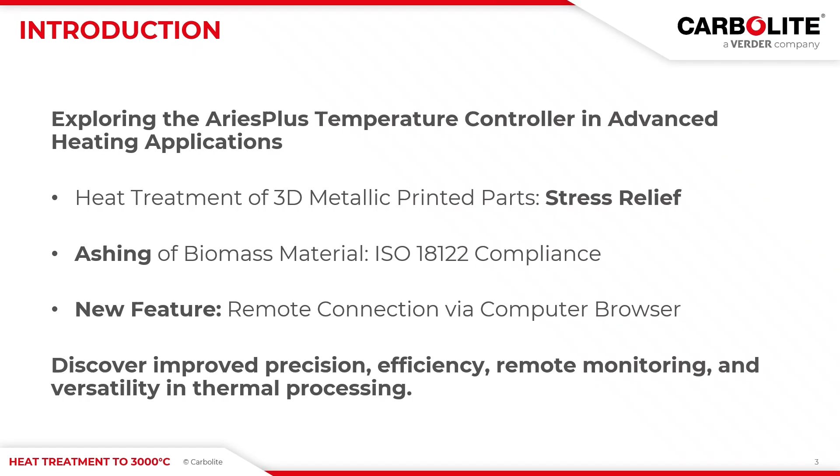Let's begin with our first application, ashing of biomass material in accordance with ISO 18122. We have picked one specific standard to highlight. In reality, what we will talk about here can be relevant for all regulated ashing processes.

Determining the ash content in biomass is essential for quality control and regulatory compliance in various industries. Processes like this demand superior temperature control, strict adherence to test standard protocols, and reliable data traceability for reporting and analysis. The AriesPlus controller addresses these needs by providing reliable temperature ramping, programmable ashing cycles, and web-based access for real-time monitoring and data logging. These capabilities help laboratories achieve both accuracy and efficiency while maintaining full compliance with regulatory standards.

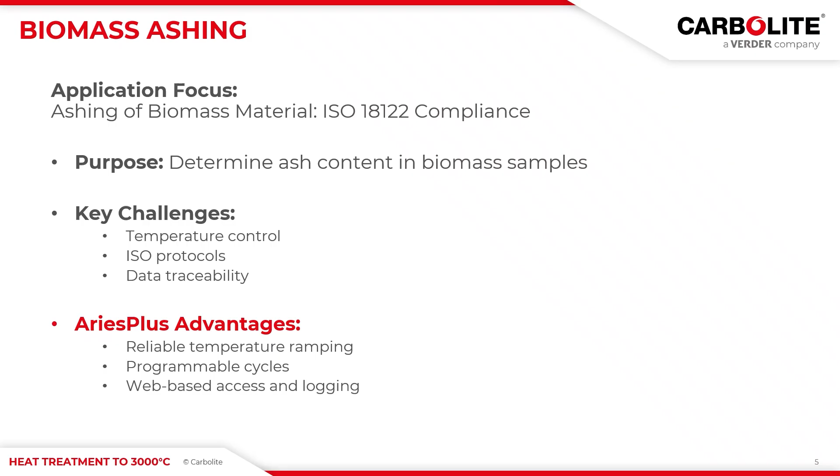The temperature controller should be capable of precise ramping and holding at set temperatures, with programmable ashing cycles that can be utilized for different ashing standards. Features like real-time monitoring, remote access, and automatic data logging are essential for traceability and for maintaining comprehensive records. Built-in alarms and safety features help protect both the equipment and the samples. Finally, process parameters such as the correct ashing temperature, duration, and sample preparation must be carefully managed. Thorough documentation of results is vital for both quality control and demonstrating compliance with ISO requirements.

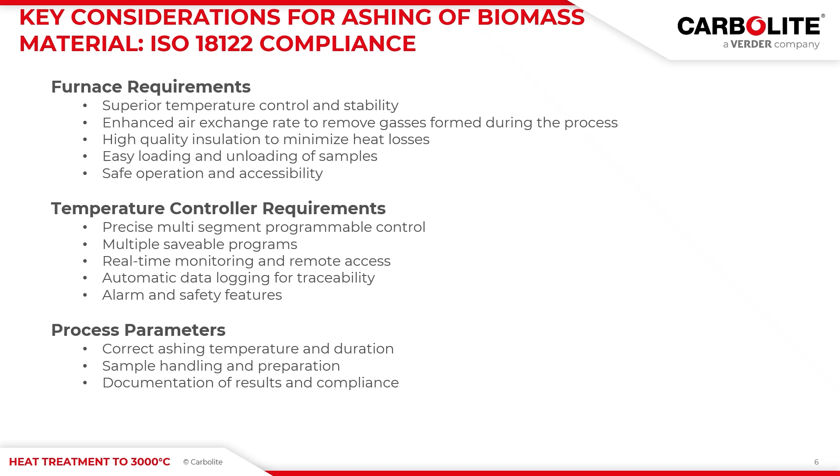The ashing process itself requires a specialist furnace that can reliably maintain the target temperatures. Crucibles used in this process must be inert and capable of withstanding these high temperatures to avoid any interaction with the sample. Once ashing is complete, both the crucible and the residue are cooled in a desiccator to prevent moisture uptake before final weighing. Ash content is then calculated as a percentage of the dry mass using the initial and final weights.

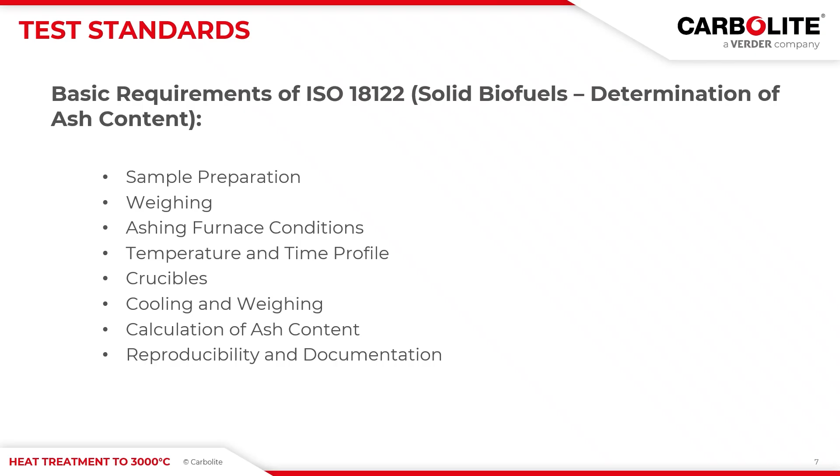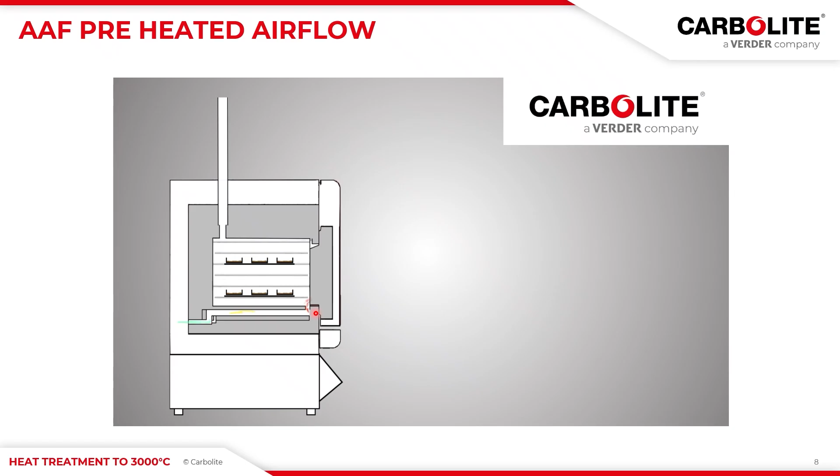Here we see a cross-section of an ashing furnace where we can explain the key features. So at the rear we have an air inlet where air is drawn into the furnace. It moves along these channels which preheat the air before it enters the chamber. The hot air then flows around the inside of the furnace chamber, guiding smoke and volatiles towards the exhaust. The high airflow provides a constant supply of oxygen to aid combustion, and then finally the exhaust fumes and volatiles are drawn up through a tall chimney and out into an extraction system or through an optional catalytic oxidizer.

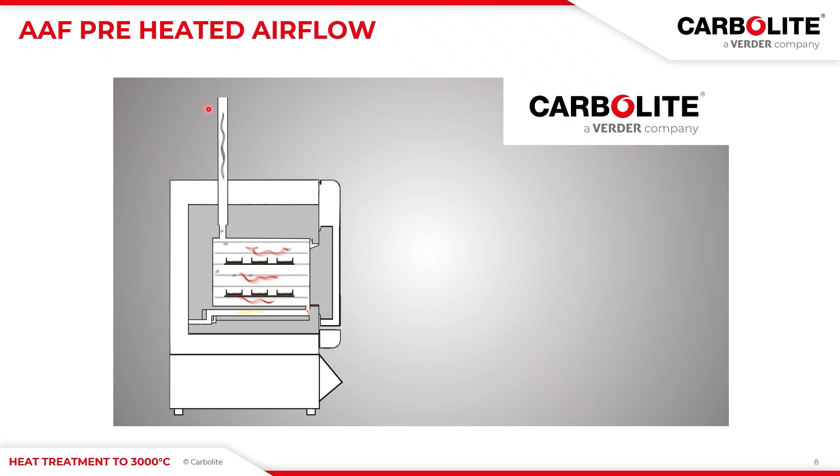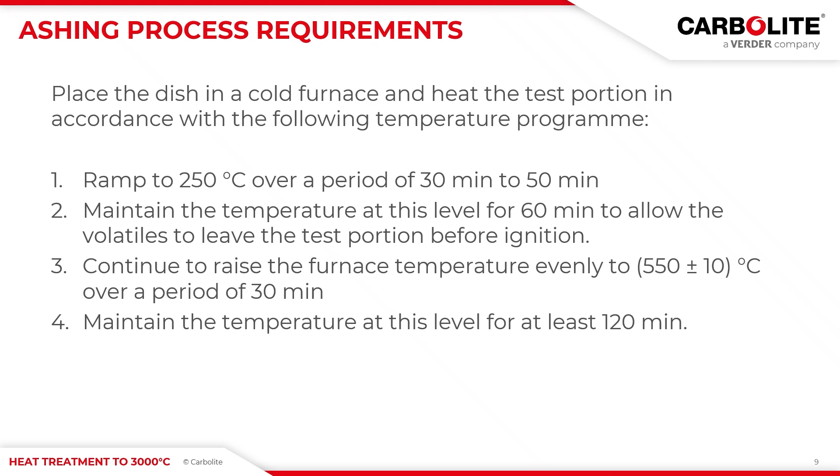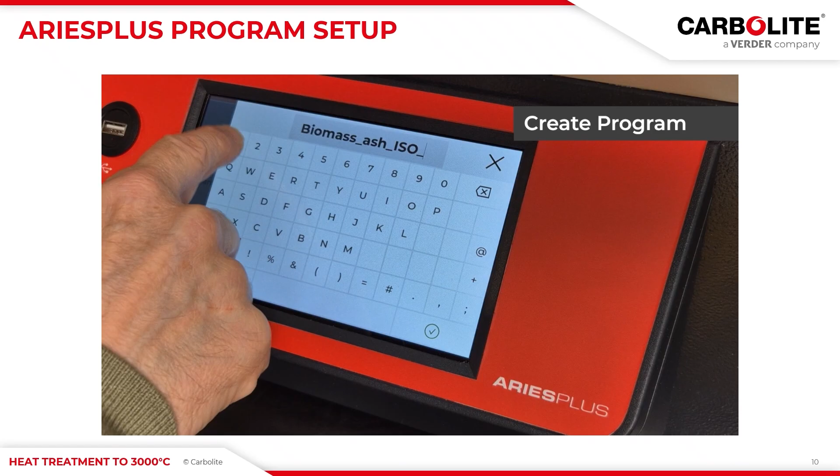So these can be very descriptive, and the user can easily edit the program name after the program has been created, should they wish to do so. Once we create the program, you'll see that it automatically navigates to the first segment of the program.

In this demonstration, we're using that biomass ash standard test that we looked at in the previous slide. This starts with a ramp to 250 degrees C with a ramp rate of 5 degrees C. So that is entered in the first segment.

Then we press and hold and use a little plus button to enter the next segment, which is a dwell, in this case for 1 hour. Then we are setting up a guaranteed soak band and a tolerance of 10 degrees C. This is because the standard specifies that the temperature must be at the target temperature plus or minus 5 degrees C for that dwell. Then you'll see the next ramp is to 550 degrees C with a ramp rate of 10 degrees C per minute.

Then we enter another dwell, this time for 2 hours. Again, the guaranteed soak band and tolerance of 10 were already set because it's assumed we wanted to use the same setup as the previous dwell. Then we're going to enter a step back to 0, and that's the end segment. So there we are, that's the program setup.

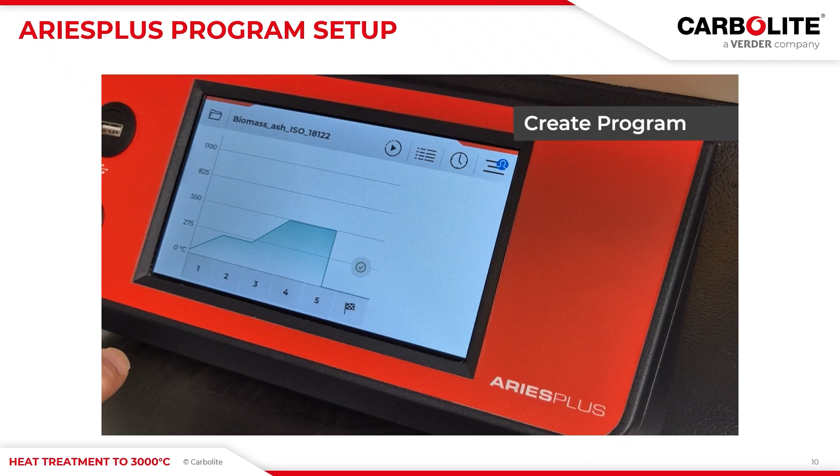Now that we have the program, we can run it. So we navigate to the program and press the play button at the top of the screen, and you'll see that the home display changes to show the detail of the program. There's a little green indicator next to segment number 1, which shows you the current running segment.

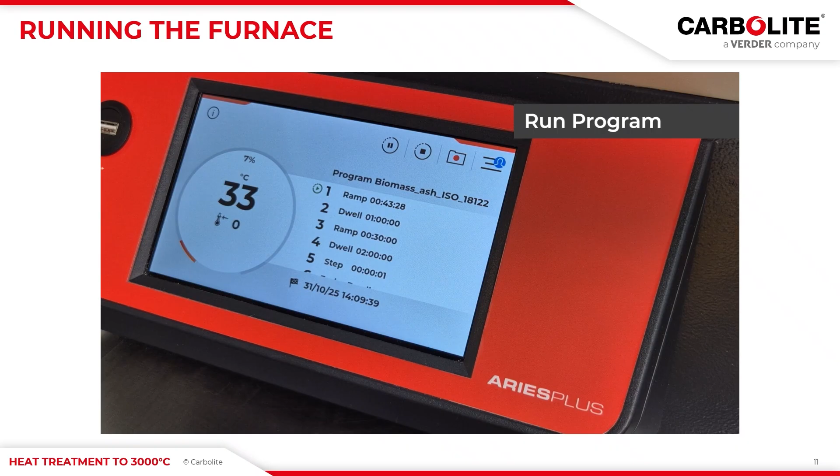By following the heat cycle, we remove all the combustible materials, leaving a small amount of mineral ash behind. Accurate preparation, heating and weighing at each stage are essential for reliable ash content determination and compliance with industry standards.

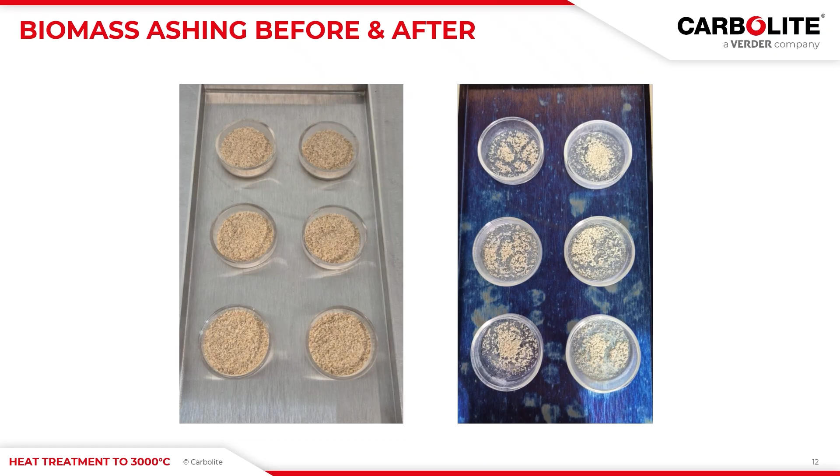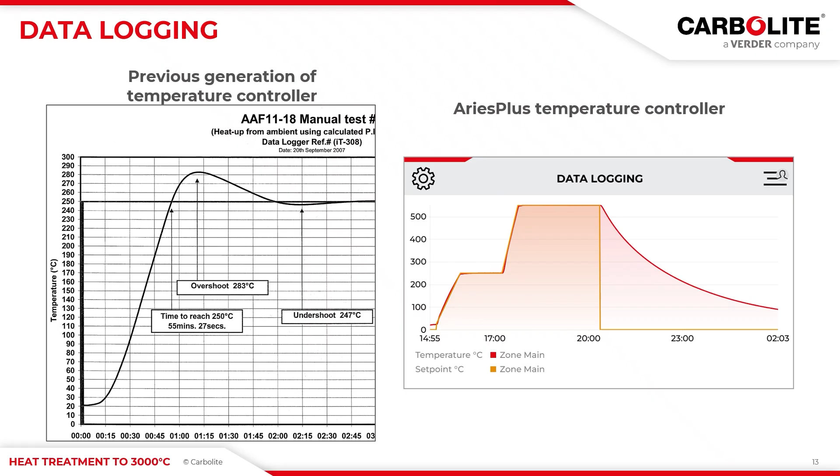This is the graphical user interface of the AriesPlus controller, highlighting its convenient data logging and download features. The AriesPlus interface allows the user to easily access logged temperature versus time data from any heat cycle. Downloading this data is straightforward.

If you're working directly at the panel, you can save the log files to a USB stick mounted in the control panel. Alternatively, if you're connected remotely via a browser, the data can be downloaded directly to your computer's Downloads folder. These flexible options make it simple to review, share, and archive process records and support the traceability and compliance with quality standards that users are likely to require.

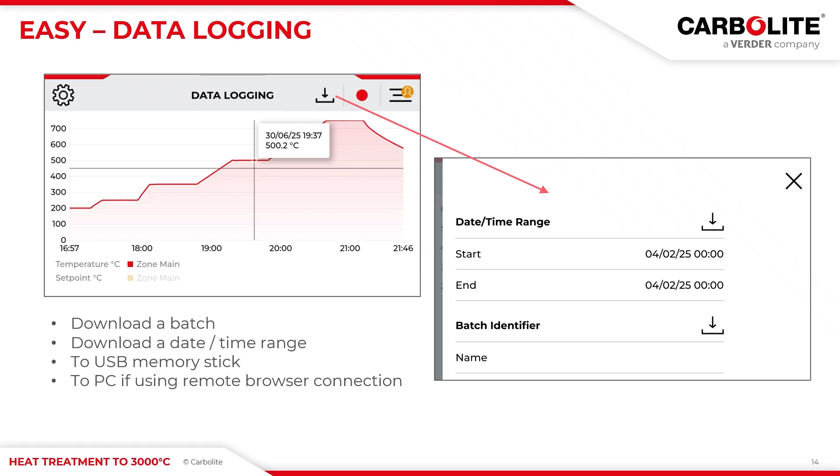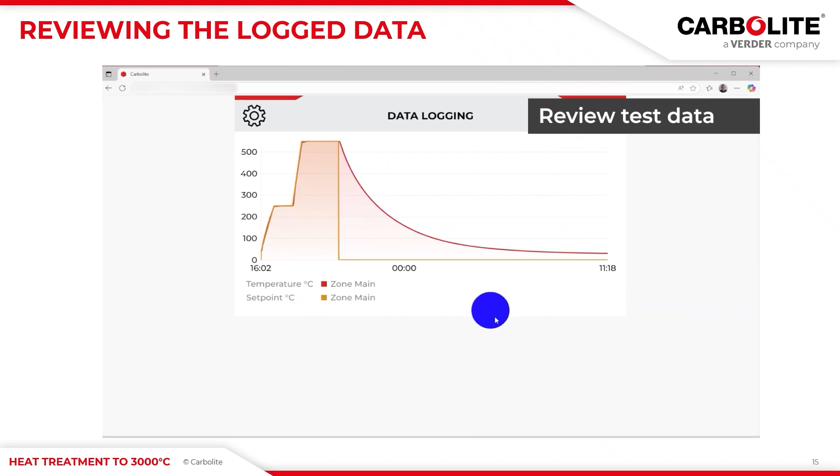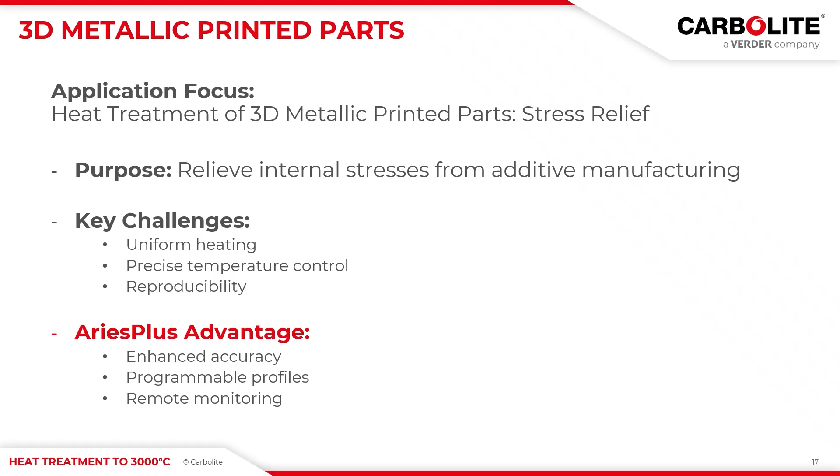As we did earlier, let's look at the key considerations. Firstly, the furnace must provide uniform temperature distribution to ensure that every part is treated consistently. If required, the furnace should have the capability of a controlled atmosphere to prevent oxidation or contamination of parts. Reliable insulation and high quality atmosphere containment are also essential to maintain process integrity.

Next, the temperature controller needs to deliver precise temperature control and stability throughout the process. It should allow for programmable heating and cooling profiles to tailor the stress relief cycle to your specific materials. Real-time monitoring, remote access, and robust data logging are important for traceability and quality assurance, while integrated safety features such as over-temperature protection and alarms help safeguard both your equipment and your process.

Finally, process parameters, including the stress relief temperature, soak time, ramp rates, and cooling protocol, must be optimized based on the material and geometry of your printed parts. With these considerations in mind, you can achieve consistent, reliable stress relief results for your 3D metallic printed components.

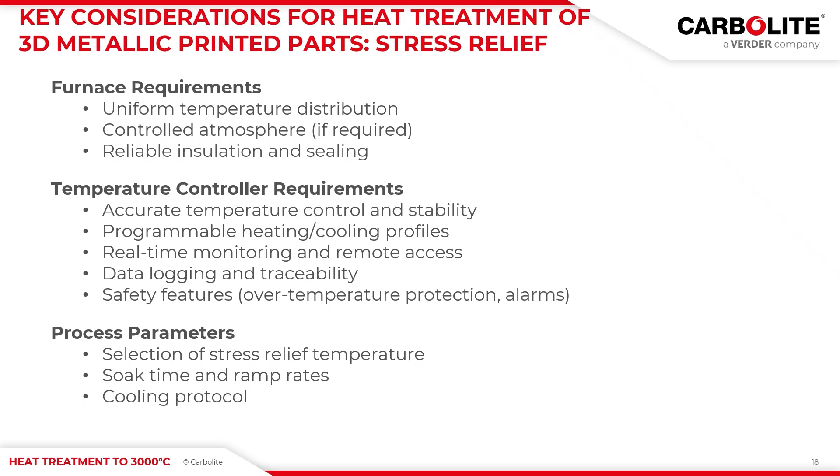Here we see the equipment setup used for stress relieving 3D metallic printed parts. This is the Carbolite CWF furnace paired with an optional A105 metallic retort and the advanced inert gas package. This combination is ideal for precise heat treatment of additively manufactured components.

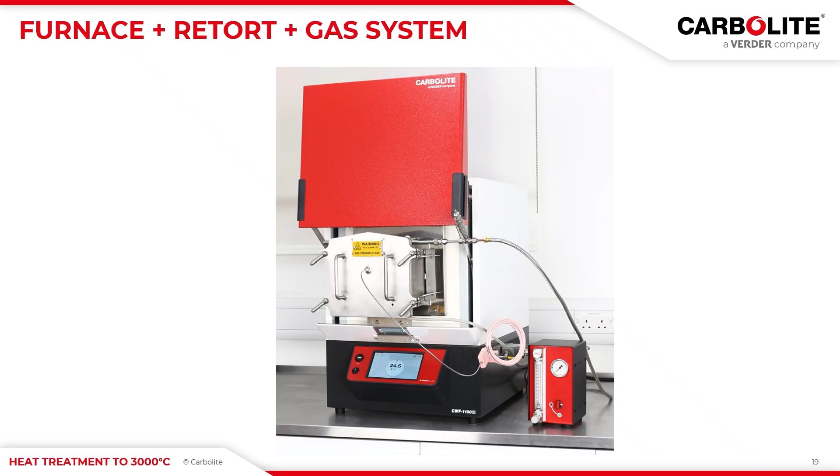The CWF furnace provides reliable and uniform heating, while the metallic retort creates a controlled environment inside the chamber. And with the advanced inert gas package, we can purge the retort atmosphere to achieve low oxygen levels, ensuring the parts are protected from oxidation during the stress relief process. Together, these features deliver the temperature control, atmosphere purity, and process stability required for high-quality heat treatment of 3D printed metal parts. We can add an optional cascade thermocouple to the retort and the control system.

This is the thermocouple entering the retort. This setup lets the AriesPlus controller adjust the heating based on actual retort conditions, improving temperature uniformity and process accuracy. It's especially useful for applications needing tight temperature control, like stress relieving of 3D printed parts or precise analysis.

Here we have two key electrical safety features: an earth connection, which protects against electrical faults, and a proximity switch, which ensures that the retort is correctly placed in the furnace. These features keep the equipment and operators safe and ensure compliance with safety standards.

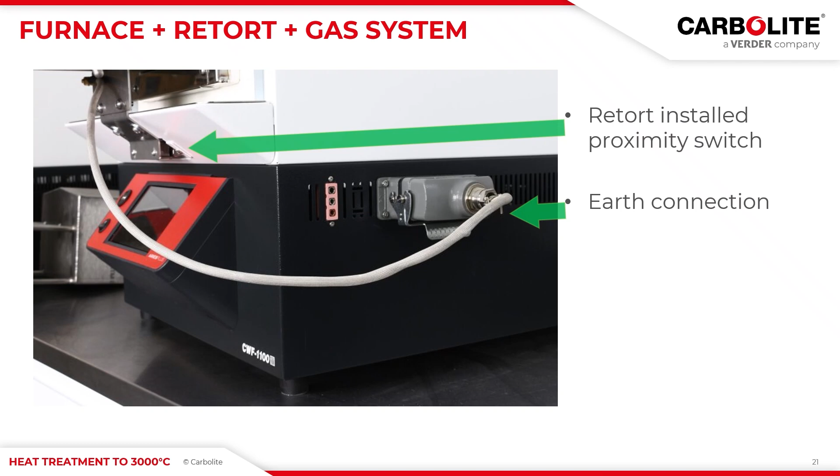The table here shows how inert gas purging reduces oxygen in a furnace retort. Each full volume change cuts the oxygen by a factor of 10, quickly lowering the levels with each purge, crucial for oxidation sensitive processes. The table displays the drop in oxygen percent and parts per million as the purge continues. With proper gas flow from back to front, the retort atmosphere becomes highly inert, protecting the components and ensuring heat treatment quality. The inert gas package, along with the retort, allows nitrogen flow rates from 2 to 27 litres per minute to suit different process needs.

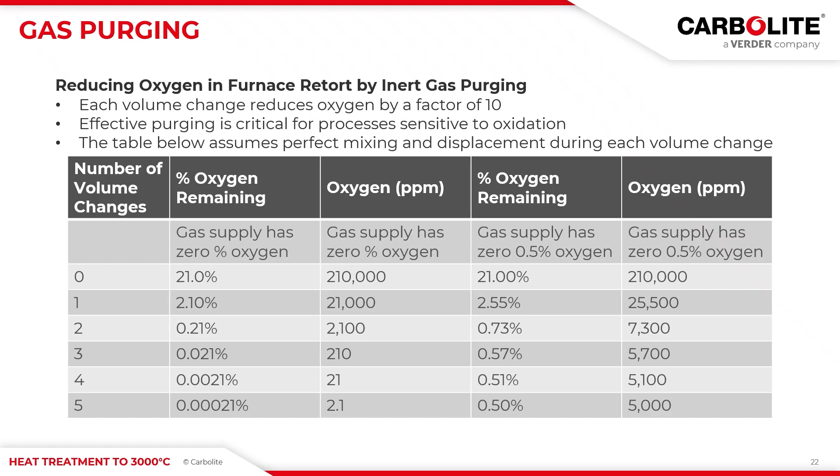The advanced version features an automatic solenoid valve, so gas flow can be controlled by the AriesPlus program without manual input. Seven flow scales for different gases are included and can be easily installed by the user with no need to specify the gas type when ordering the equipment.

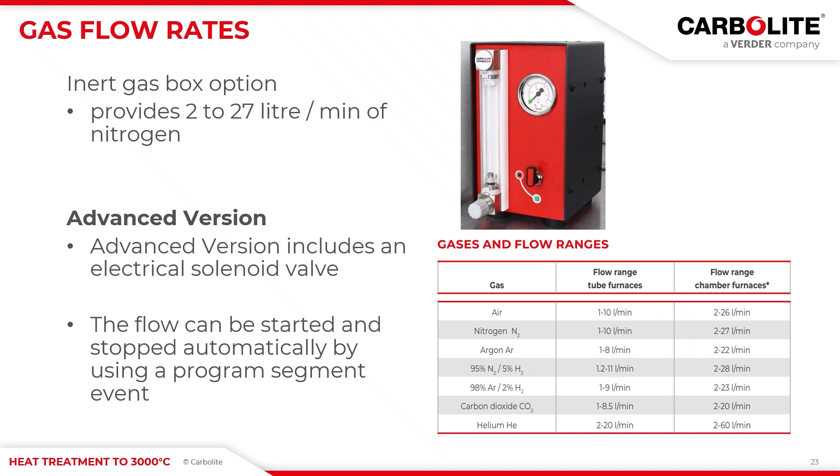Similarly, the thermally insulated door plug acts as a barrier against heat loss at the door, further supporting consistent temperatures and reducing the risk of localized cooling that could affect the process. Together, these design elements play a crucial role in achieving reliable and repeatable heat treatment results, especially for applications sensitive to temperature variation. Complementing this, the AriesPlus temperature controller provides excellent control stability, allowing precise management of temperature set points and ramp rates. Its advanced algorithms and responsive feedback ensure that the desired thermal conditions are maintained consistently over time, contributing to the overall quality and reproducibility of your heat treatment process.

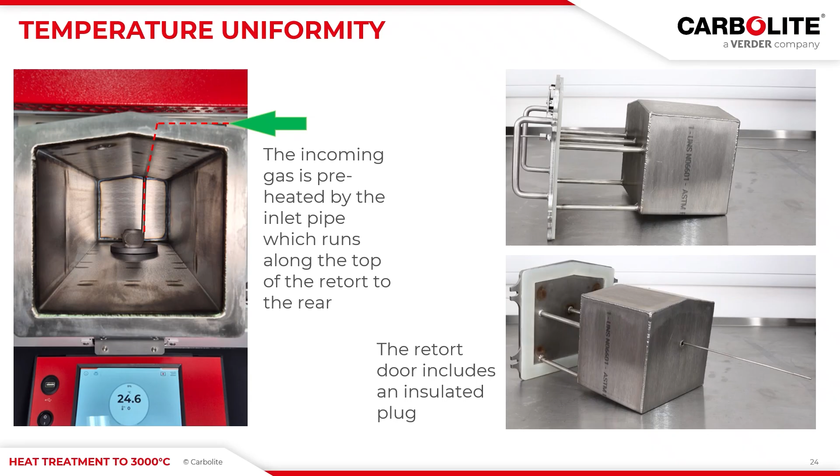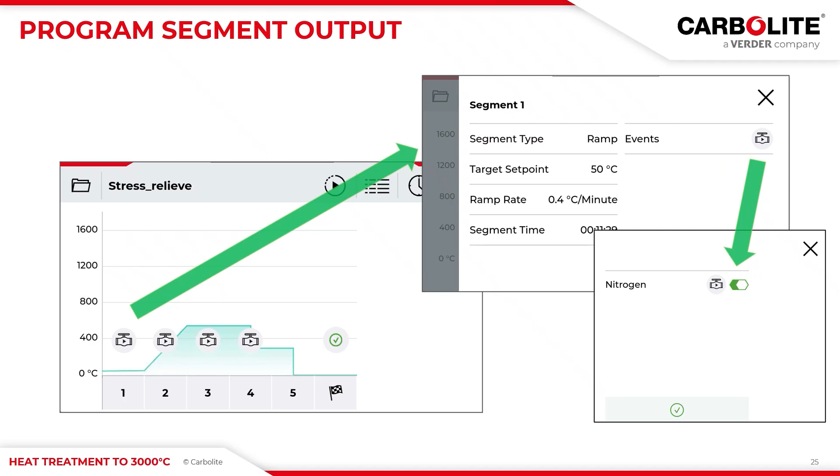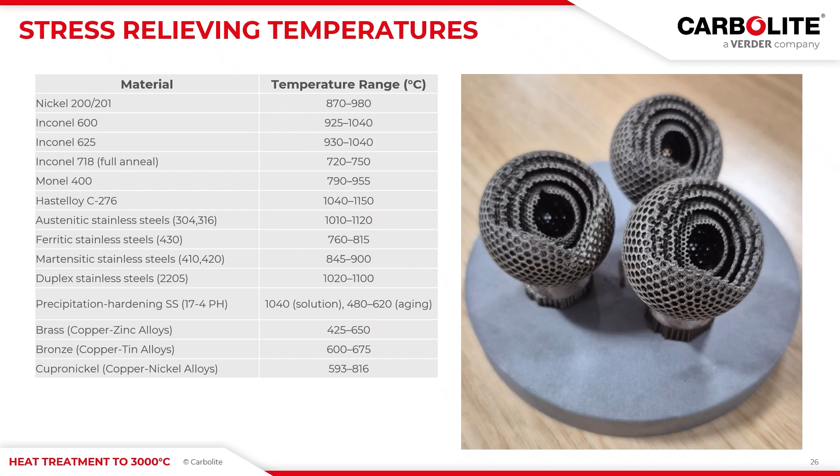For the next section of this session, we're going to take a look at the AriesPlus connectivity features and how that appears on a computer browser and a mobile device.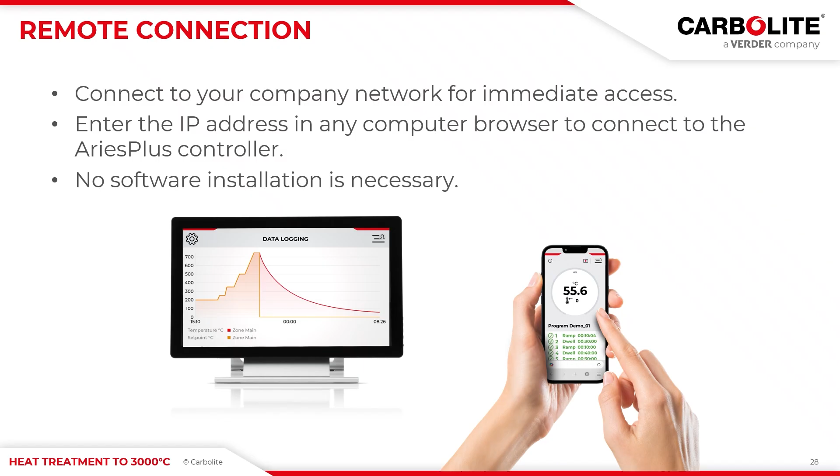Here we see the AriesPlus controller on the product, and if I press this information button, I can scroll down and see the IP address. And we have a computer with a browser, the computer's on the same network.

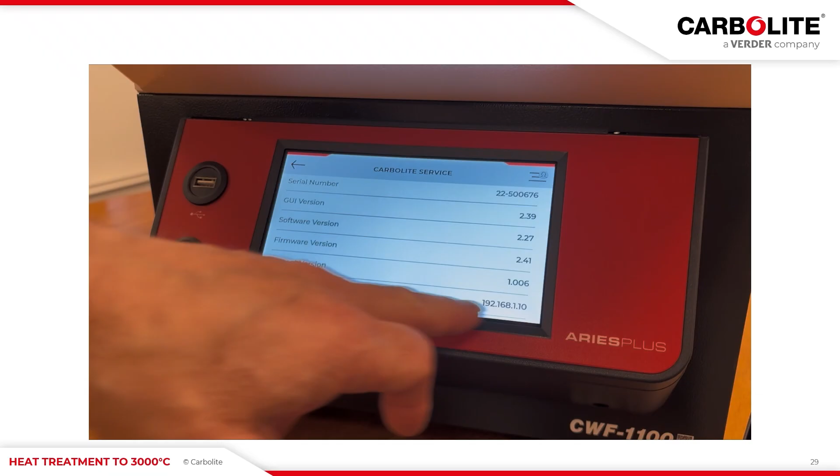So if I type in the IP address that we see on the AriesPlus screen, you'll see it connects immediately, and you're seeing the same screen.

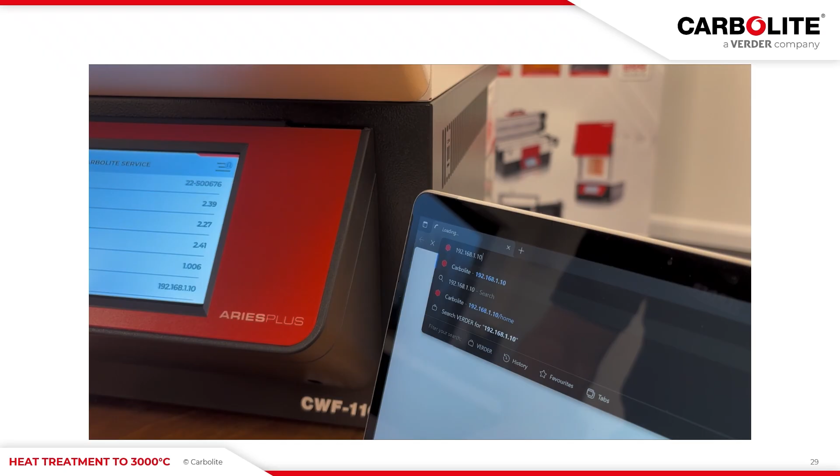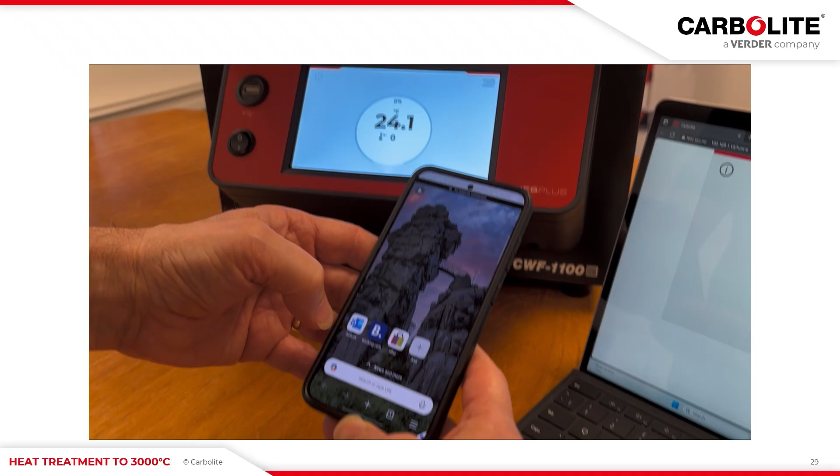I also have a mobile phone here that's on the same network. So again, if I type in the same IP address and press go, we see the AriesPlus on that mobile phone as well.

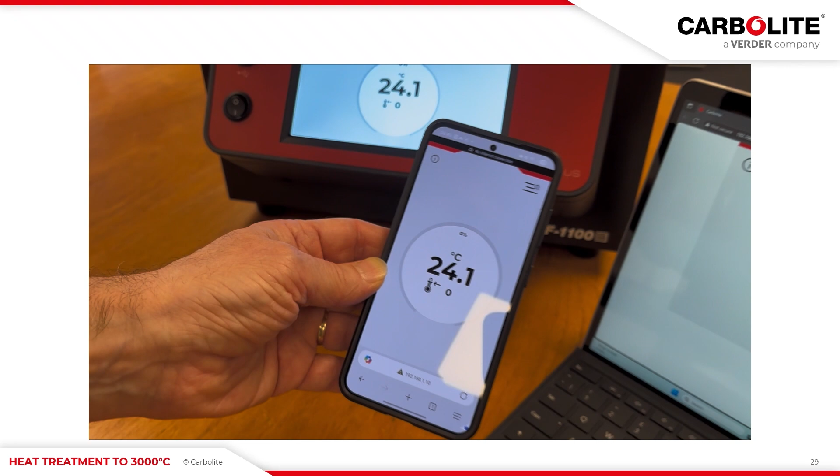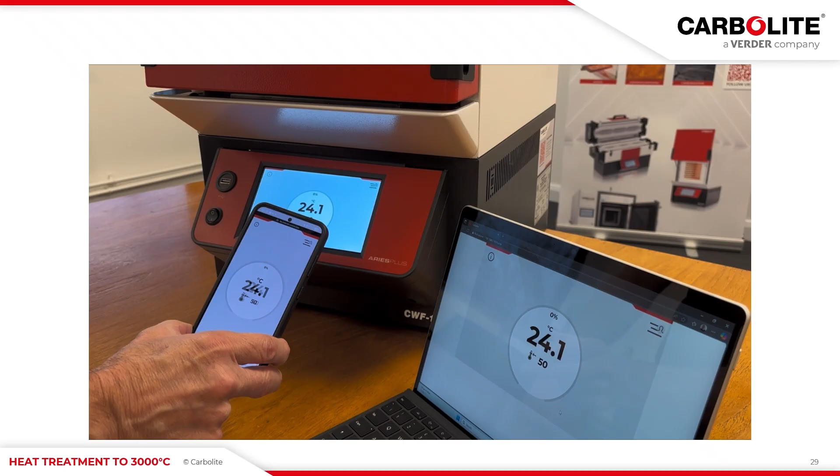So any browser on the same network we'll see. If I set a set point on the actual controller, you'll see the two remotely connected connections will see that set point immediately as well. It's very instantaneous. If I make changes on the controller, you see those changes come through on the browser connections pretty instantly.

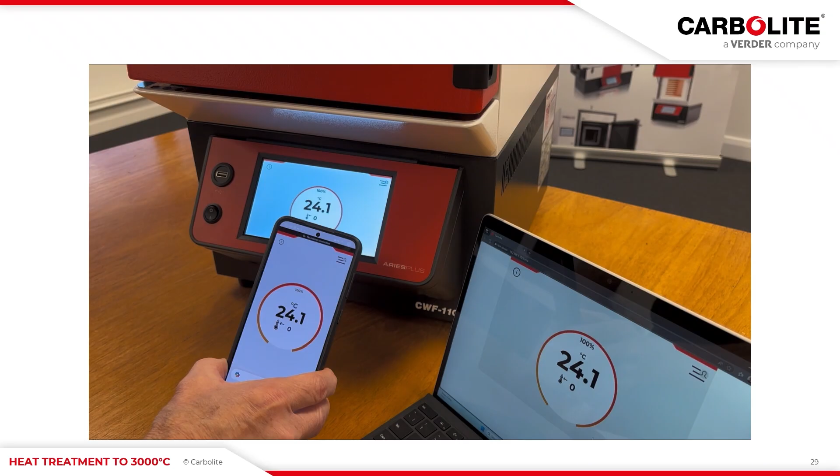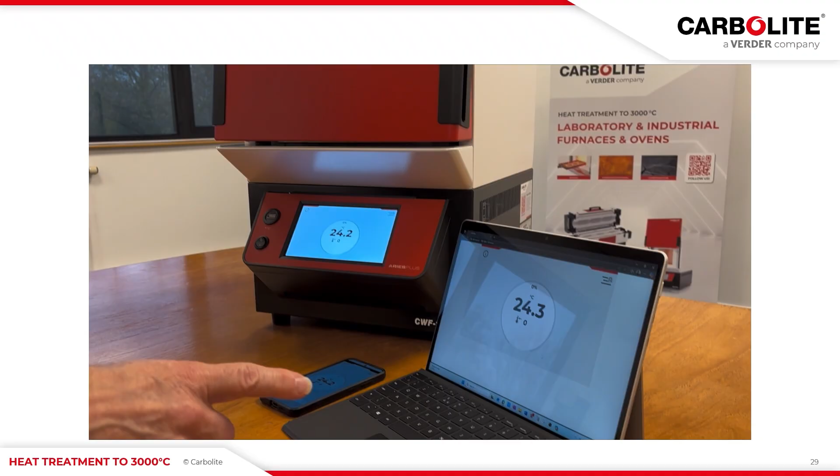So I will go ahead and create a program on the browser. This happens to have a touchscreen as well, this computer, so I need to log in at supervisor level. Please forget this password. And it offers to save it. I'm not going to save it.

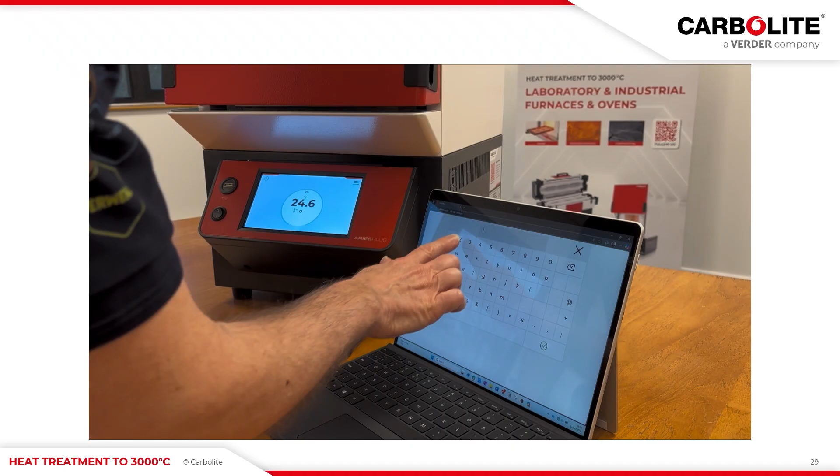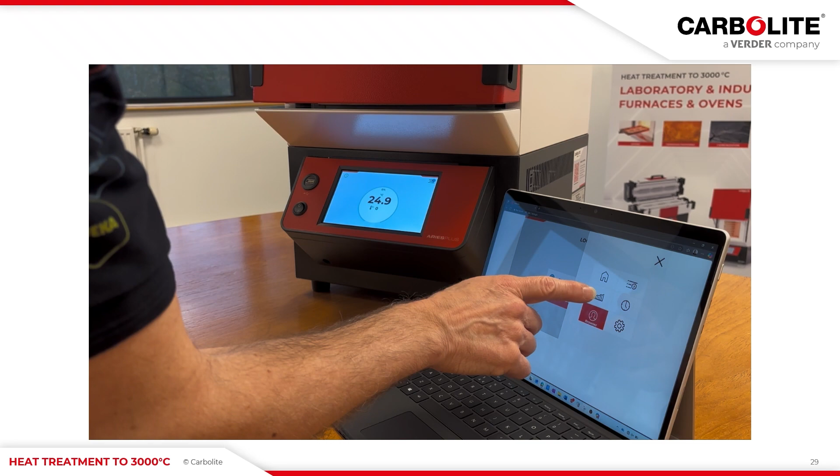Let me navigate to the program screen, and if I go back to the folder list, you'll see there's a new button. I press new. I can enter a name for the program.

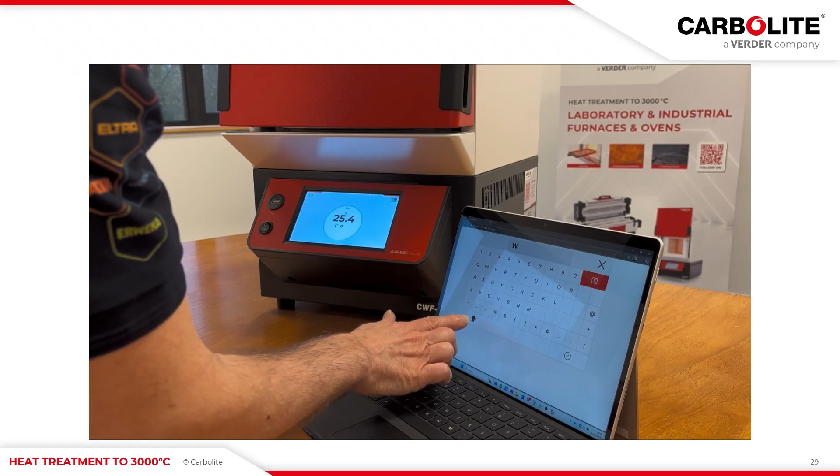And it takes me, as you saw in our demonstration earlier, to the first segment. So I'll repeat what we were doing earlier on. 250 degrees C, a ramp rate of 5 degrees C per minute. It calculates the time, based on the current ambient temperature, because we're starting from ambient.

And then I press and hold, I get the little plus key to add in a segment. I'll make it a dwell, we will go for 1 hour. And press the little tick symbol to enter that.

Then I'll just add in another segment. I'll make it quick. I'll just step back down to 0 so we're not waiting too long for me to show you the demo.

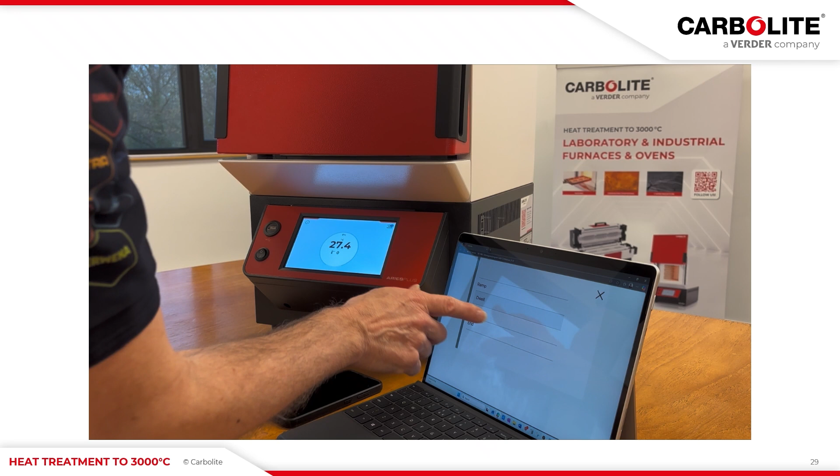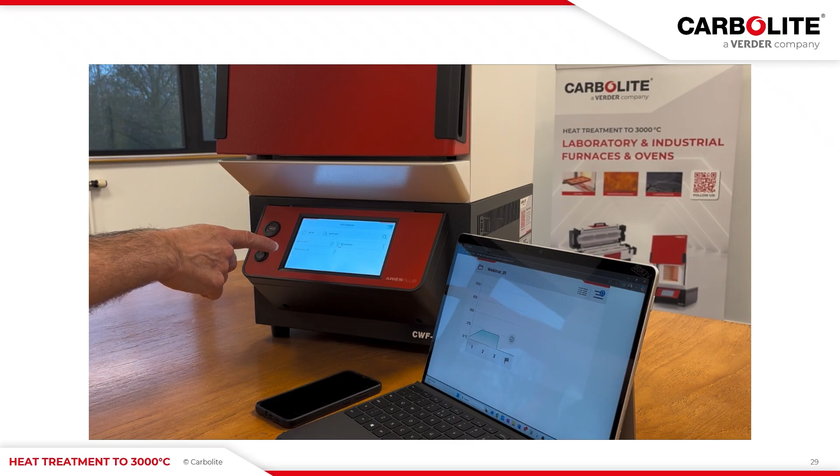So there we see the program, and what's important to know is then if we go to the controller on the product, if I navigate to the programs, you'll see that program is there. So there's no transfer required. The browser is connected to the controller. So when I'm creating that program, I am creating it on the AriesPlus controller, even though it's a remote connection.

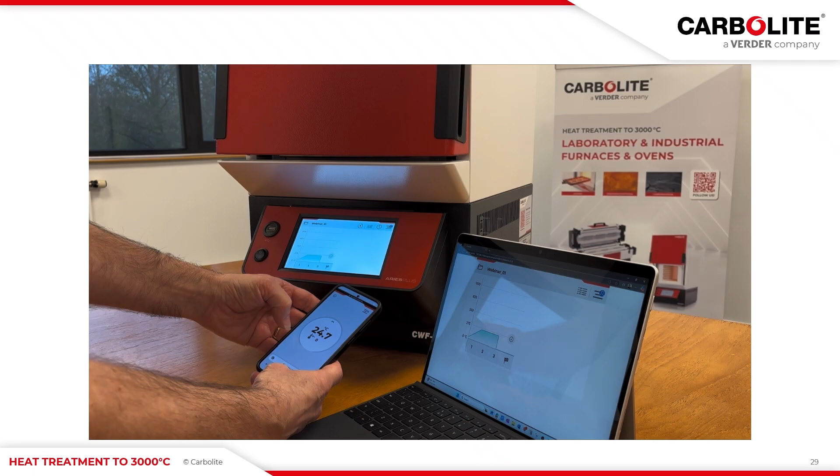And of course, if I navigate to programs on the mobile phone view as well, there we are, same program. It automatically opens the program you've most recently viewed or edited.

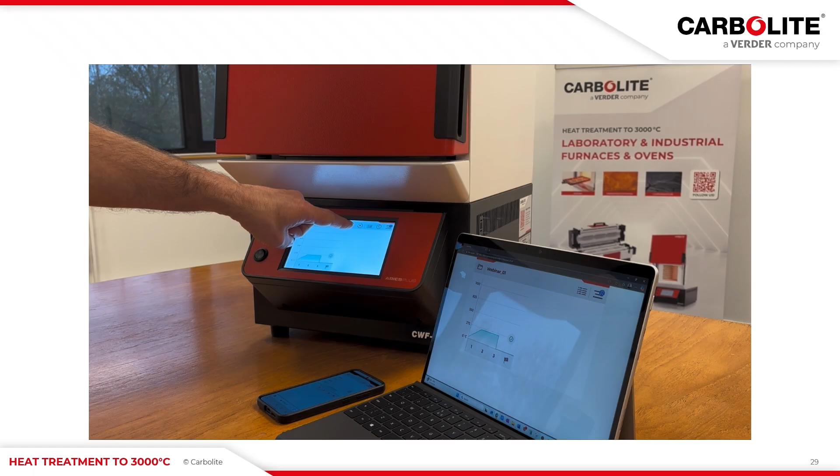Then you'll see there's a run button here on the actual controller, and on the browser view there's no run button. So we're not allowing you to start the heating process remotely because of safety concerns.

So you need to start the program at the actual product. I'll start the program. And you'll see we get the same display, same on the phone as well. There we are, program running.

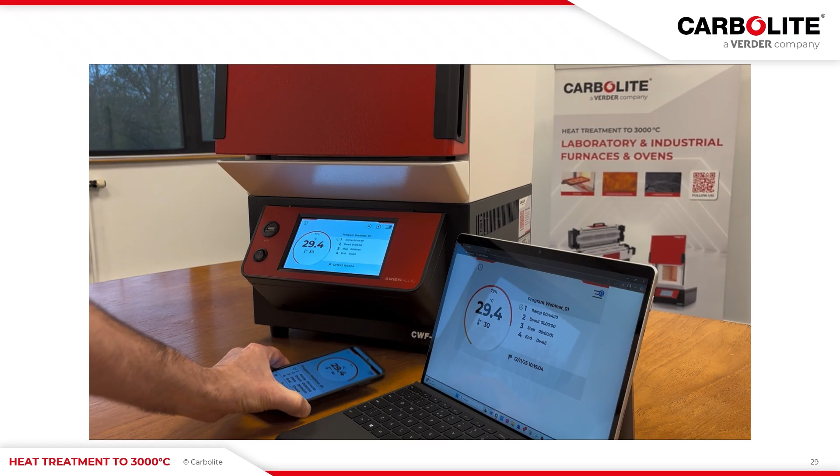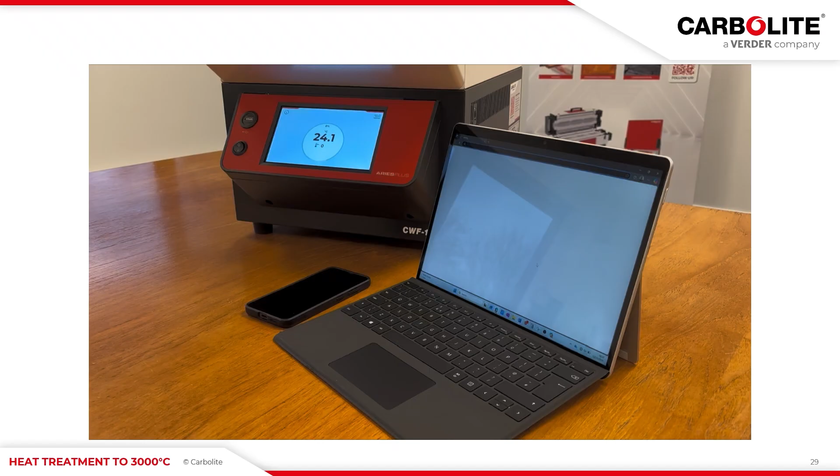Connecting the AriesPlus controller to an Ethernet network, you gain the ability to access and interact with the controller remotely using a standard web browser. This means you can monitor and adjust settings from any computer or compatible device within your facility, as long as it's connected to the same network as the controller.

This remote access capability offers greater flexibility and convenience, allowing you to supervise processes, review data, make adjustments without having to be physically present at the controller. So we will proceed to a live demonstration and see how these features work in practice.

For safety, the AriesPlus remote interface does not allow heating to be started. This ensures that heating operations can only be initiated locally at the controller, protecting both users and equipment.